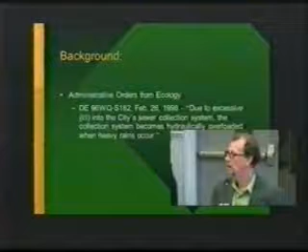In terms of background, the city's been under administrative order from Ecology for a number of years. This is a quote from one of the letters we have. These orders have been modified over time. In 1996, there was a concern about the amount of I&I, inflow and intrusion, into the system, and the collection system, as is quoted here, becomes hydraulically overloaded when heavy rains occur. What folks were experiencing out and about in the community were surcharging manholes, parks that were being flooded with raw sewage, and other issues that Ecology said you must take care of.

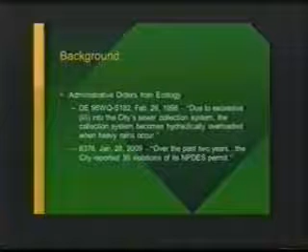In more recent times, we've had problems in relation to the I&I that have resulted in permit violations from our downtown plant. The downtown plant is upgraded now, but at the time we were dealing with this, we had a very old plant that was past its design capacity, and we were trying to understand how to go about taking care of these orders and address these sanitary issues. Ecology was asking us to be proactive.

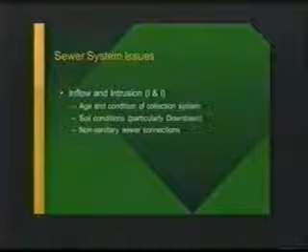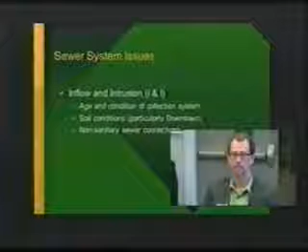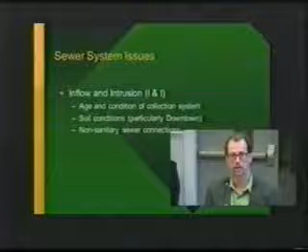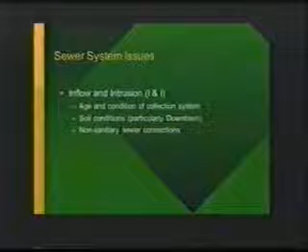So, a little bit of a description about our inflow and intrusion, particularly in the downtown basin. Some of the systems here were built in the 20s and 30s. At the time, the technology was to actually build a leaking sewer system, and that was part of the way to address effluent—to allow it to leach into the soil, into the groundwater, and just get rid of it. What we know now is those leaky pipes are causing a lot of this inflow and intrusion that we're dealing with, and they also affect the quality of the groundwater. So particularly in the downtown area, where we have a high groundwater table, there was a heightened need to deal with these I&I issues.

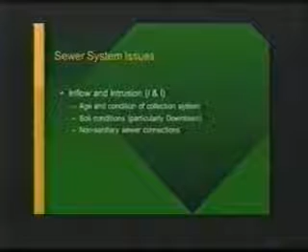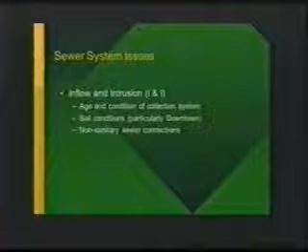Soil conditions play a part in this. Some areas in town are different than others, again, the downtown being most acute. It also has creeks nearby that are affecting the movement of this groundwater. Another issue that is part of this equation is other connections that aren't part of our sanitary sewer at all. Folks that are just connecting to get rid of stormwater will often make a connection to the sewer system to deal with that.

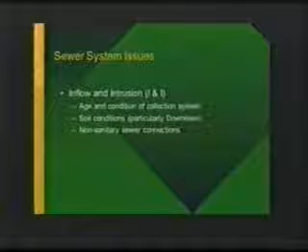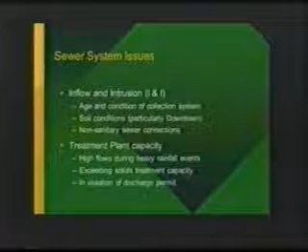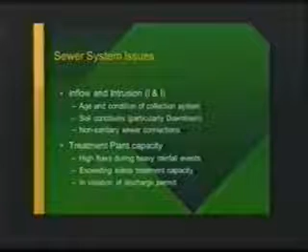The second part of this was our treatment plant and dealing with the capacity needs. The I&I, particularly in high flow events, would overwhelm our system. We couldn't provide the treatment we needed to provide. We would exceed our solids treatment capacity. That was really an effect of the system just needing this upgrade, not designed for a city of this size. And again, violations of our discharge permit basically on a monthly basis.

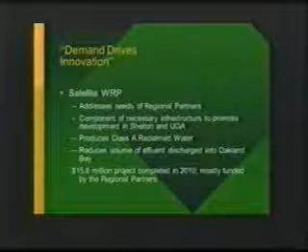Early on in the discussions with our regional partners on how to address this, there was a plan that was rolled out to update the downtown plant to accept effluent from our regional partners, the State Patrol and Department of Corrections. Over time, that plan was modified to what we have today, and that's building a satellite facility. That satellite facility is serving our regional partners, but it also provides us the capacity to meet new development and other customers in the northern part of the UGA.

It produces a Class A reclaimed water, which is a nice byproduct to have. We can use that for just about any purpose except drinking water—certainly for irrigating fields and those types of things, industrial uses.

So we have a commodity that's a byproduct of this that I think is just an added attraction. We are, by completing the satellite plant, reducing the amount of volume of effluent that's discharged into Oakland Bay. As you're well aware, Oakland Bay is one of the most prolific aquaculture fields on the West Coast, and we're helping to do our part to preserve that through these measures.

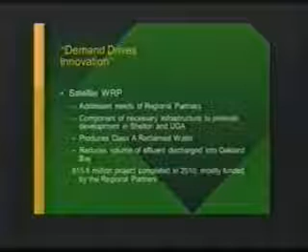This particular element of the project was finished in 2010 at a price tag of over $15 million, but most of that cost was borne by our regional partners. And they are also paying for the service of maintaining and building reserves to maintain this plant long term.

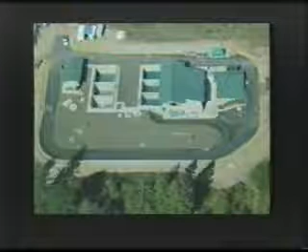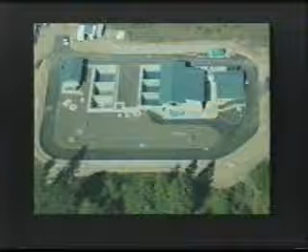This is an aerial view of the plant when it was about 95% complete. Folks in the audience maybe haven't seen that before, but this was designed so it can be built and expanded in phases. This initial phase is enough to accommodate our partners and provide the city some capacity to take on new customers, but there's enough room in the surrounding area to build 2 additional phases. So the long-term plan is to see that come through, and that's again spelled out in our CIP as a longer-range endeavor. But this facility has the capacity to increase threefold in terms of its daily ability to handle effluent from the northern area, northern Shelton UGA.

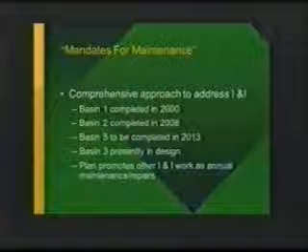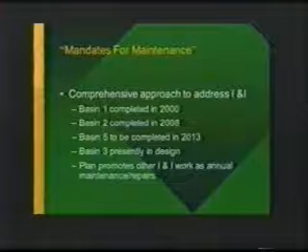Within our approach, we've landed on a sequence of events here. Some of these have been accomplished, as you see here. We initiated with Basin 1, the core area of the downtown that was completed in 2000. Some time went by, but we eventually designed and constructed Basin 2 in more recent time. That was completed in 2008.

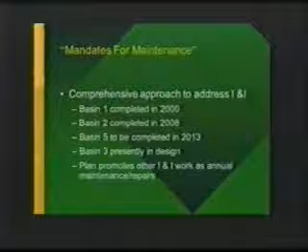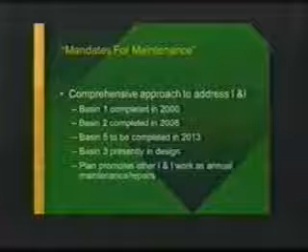We're currently working in Basin 5, which is basically the Hillcrest area around Olympic Highway South. That work's been going on over a year, and we believe in the next 6 to 8 months, probably less, the construction side of that will be done. We'll have closeout and other types of things to drag on that project over time, but the construction end of it is nearing its end. And that's a very large basin that we expect to complete.

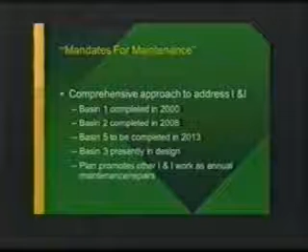We've initiated the design for Basin 3, which is the final basin in the downtown area. And we'll talk about that a little further in the presentation here, but the goal is to be prepared so that as the funding mechanism we choose is available, we're ready to move forward and complete the last of the downtown basins.

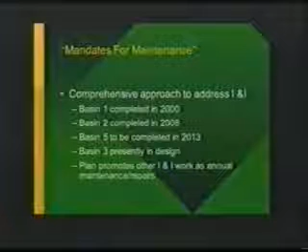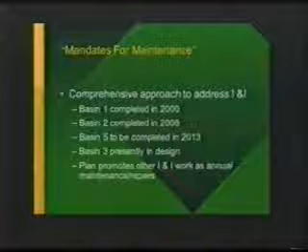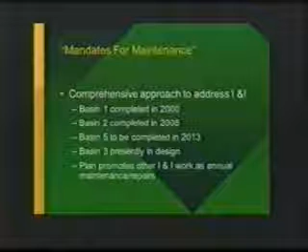Our plan is to also tackle some of this I&I work incrementally, and I'll speak about this in some detail, but we want to move from this current and past practice of tackling these basins as large projects and try to bite off pieces of a basin with some maintenance activities that we'll do over time with our city crews. We think this will save us a whole lot of money and avoid the need to borrow these large sums of money to tackle these basins. We can incorporate this into our operations.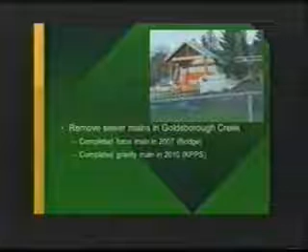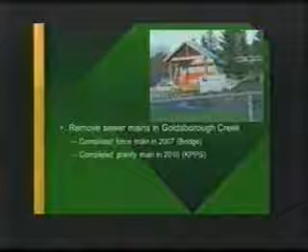In addition to all that work, we had a couple of sewer lines that were in Goldsborough Creek. And you may recall that Ecology was also asking us to address those. We removed the force main out of Goldsborough Creek in 2007. There's a bridge now on the east side of the creek. If you go past First Street, you see that little green structure there. That's the force main now out of the creek.

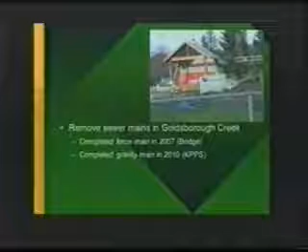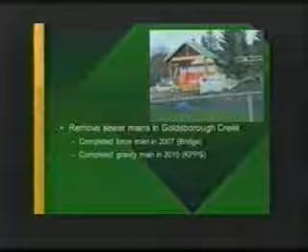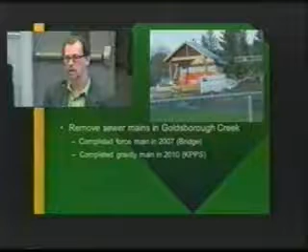The second portion of that was a gravity main that was crossing the creek on the west side. That was completed as part of this Kneeland Park Pump Station project, which the picture is showing in partial completion. That pipe is still in the creek, but it is not essentially used as our day-to-day operation. It's only there right now for emergency needs, and to help us better understand what we need to do to most effectively stabilize the creek bottom, whether that pipe serves some purpose or not, and that's part of an ongoing discussion.

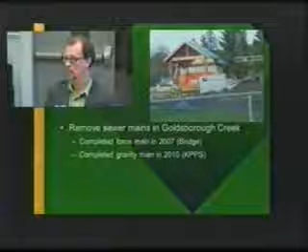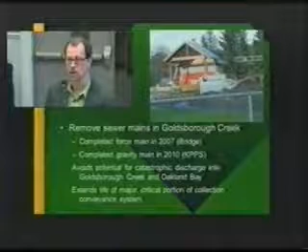But we are no longer in a position where some damage by a tree root or something coming down the creek during a high flow event would bust a pipe and cause a catastrophic discharge into Oakland Bay and affect our aquaculture industries here. So that portion has been done and it is fully completed.

Describing some of the work we did with the downtown plan, we addressed our long-term capacity needs. We increased the solids handling capacity of the system by 100%. This takes us to a 20-year planning horizon for the downtown area, and along with the I&I development that has occurred, it provided us some certainty for new development. I think that was a big milestone in itself.

You may recall a few years ago we were in a moratorium for sewer connections. We had a waiting list for folks that could come and connect, but we had a limitation on that, and this was a struggle for any large development coming into Shelton to describe how they would address our sewer needs. We have limited capacity, we have I&I issues all over town, but we have a great deal more certainty than we had then.

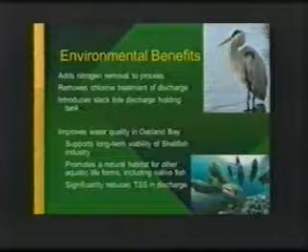It offers a number of environmental benefits. In terms of the plant operation, we added a process to remove nitrogen from the effluent. This will help the biological aspects of what's going on in the estuary and the interaction with the fish and aquatic life. We changed from a chlorine treatment to a UV treatment, so the effluent now does not have a chlorine component. And we incorporated the slack tide discharge tank, which allows us to retain effluent during slack tides, allowing better mixing as we release the effluent during tidal movement. We also extended the outflow pipe, I believe 96 feet.

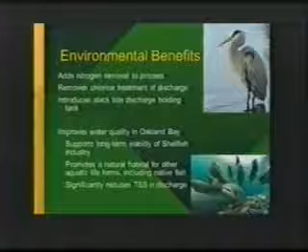These environmental benefits are paying dividends in Oakland Bay. I believe 280 additional acres have been opened up for shellfish harvesting, in part due to this activity. It's improved the natural features of Oakland Bay, particularly salmon movement through the estuary, and it's reduced TSS, which stands for total suspended solids, within our discharge.

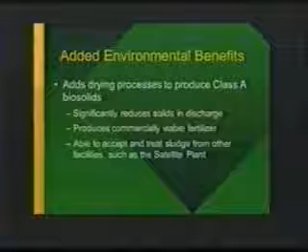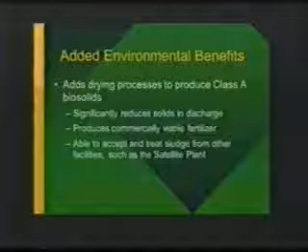But wait, there's more, as Jason would say. We also added a process so that we now are producing a Class A biosolid. This is a fertilizer you've probably heard of in other jurisdictions. We now have the ability to produce that, and we're working through the final issues with having that in full production. This reduces the amount of solids in our discharge, helps us provide fertilizer to the community for free, and we have the capacity within that system to accept sludge from other jurisdictions, so this could be a benefit the region could gain from, not just Shelton.

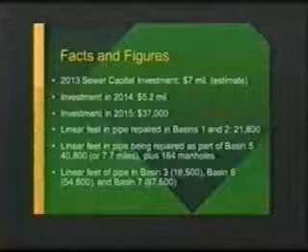Not to break up your thing there, but now I've been told that fertilizer can be put on my vegetable garden. Is that a true statement? Mike, is that a true statement? That's my understanding as well. So I'm excited about that part of your presentation. We'll have you back up the truck tomorrow. How about that? There you go. I need it.

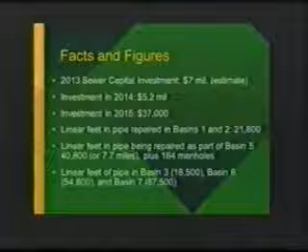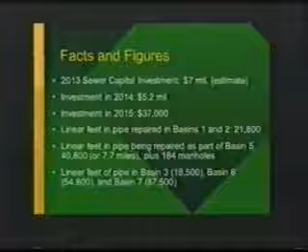Transitioning to the dollars and cents of all this, providing some figures here for the I&I work and our capital work moving forward. This year, our capital investment is going to be about $7 million, predominantly completion of Basin 5. Our investment in 2014 is $5.2 million, anticipating we will move forward with the Basin 3 construction project. As you can see, our investment in 2015 starts to diminish considerably. Part of our objective is to try to cap the amount of capital projects the utility is taking on and reduce the amount of debt we are continuing to accrue, and we're transitioning to that position as part of this comp plan effort.

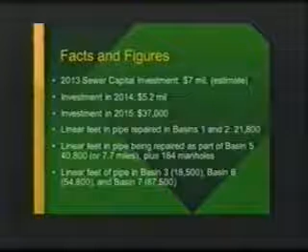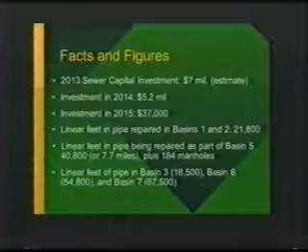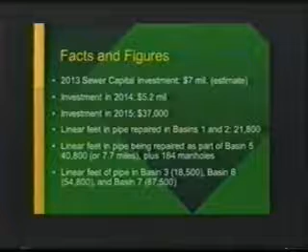These last points describe the magnitude of these projects, and I think that's worth describing. Basins 1 and 2 combined were just under 22,000 lineal feet of pipe that was replaced. Basin 5 is nearly twice the size of both of those basins, almost 8 miles of pipe. Basin 3 is almost the size of both of those basins combined, a little less. Basins 6 and 7 are described there as well. Those are newer basins, modern in some respects. There's certainly pipe that's aged, and pipe that's relatively new, so tackling those is a different approach anyway.

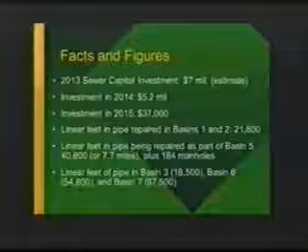Our objective is to start to look at Basins 4 and 6. Basin 4 is a very small basin, and we'll just continually make steps to improve the I&I issues we're dealing with, to monitor that, but to track away from this large basin-wide effort that requires a lot of debt capacity.

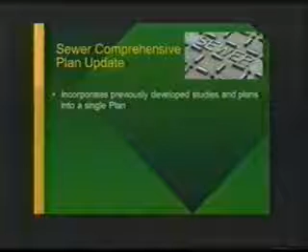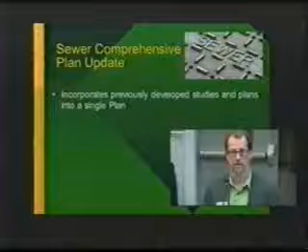So as we describe the sewer comprehensive plan, we'll be bringing that to you in the coming weeks. That plan, in its larger sense, was developed by taking a lot of planning work we've done over the course of the last 15 or 20 years and combining that into a single plan. There's been a lot of effort to study and analyze our sewer systems, but not a real plan update for quite some time. So this plan provides that single document.

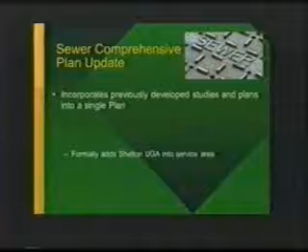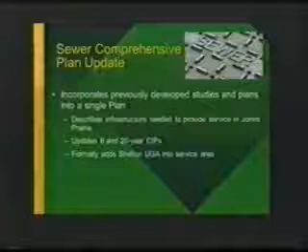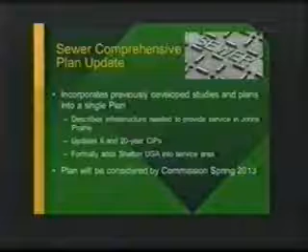It will assess what we need to do as a utility to provide service to the entire UGA. That has never really been analyzed before. Part of that is what infrastructure is needed to eventually serve the Johns Prairie area, and in particular the industrial development out there. It updates the 6-year and 20-year efforts, again trying to assess our needs for the long-term and near-term. We'll hopefully have that completed in a few weeks and begin a public process and discussion with agencies and others as we formally adopt that plan.

Our consultant that prepared the sewer comprehensive plan looked at this in terms of lineal feet of pipe, size of material, and did a quantities estimate analysis of the project, coming up with their own estimate. Their estimate is a little higher, at $3.8 million, and that's the number we used in our analysis moving forward. I believe it's a conservative number in terms of what this project may really cost, but that's what you'll see in the plan.

The plan describes these trunk lines within the city that we need to address over time. Mainly these aren't necessarily an issue because of I&I issues. They're an issue because of capacity issues—certain pipes in limited areas are approaching their capacity now, and as new development occurs, we need to figure out how to upsize those or make sure we can accommodate development as it occurs.

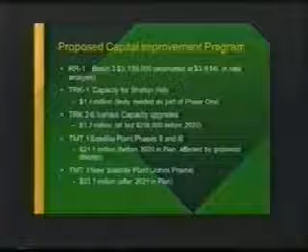The plan includes second and third phases of the satellite plant, as I earlier described. Those are expensive endeavors. The second phase is anticipated around 2019 in the plan, but we don't believe that will necessarily play out as things go on.

What we are anticipating is to include, as part of the Shelton Hills development of their systems, a diverter that will allow us to divert our effluent flows between the satellite plant and the downtown plant. By doing that, one benefit will be to extend the capacity of the satellite plant. Otherwise, we would have to begin implementing a second phase sooner. By being able to shuttle some of that effluent down to our downtown plant, we can extend the time frame needed to actually implement phase 2. That will probably go beyond that 2020 horizon, and it's not unlikely that phase 3 might even approach the 2030 horizon.

The last item here is a new satellite plant in Johns Prairie. The cost associated with that is in the slide—about $23 million. Of course, that's a long-term item, probably on the far end of the 20-year horizon, and that's not built in. Neither of those projects, in fact, are built into the analysis in terms of what we need to do with the rates now. It's something to think about, but it's not in any of the rate analysis we're contemplating at this time.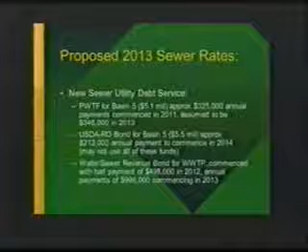The bottom bullet describes the payments for the wastewater treatment plant, the big project. We started paying that with a half payment in 2012 of nearly $500,000. The annual payments for that loan are just under $1 million, and that will commence this year. We will owe the USDA $1 million this year of new money for debt service on the wastewater treatment plant.

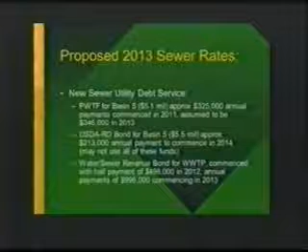So how are we going to pay for all that? We have two scenarios that we've developed as part of our analysis. One would increase the rates 22% for the remainder of this year, which is 8 months. That scenario, scenario 1, assumes that we will need to find additional capital funding to complete Basin 3, and that's built into that rate analysis. In fact, it shows here that we're anticipating we would begin to make $169,000 debt payments in 2014 to start paying that debt, and that is included in this performance.

Scenario 2 is an annual rate increase of 20% for this year. But that assumes that we would move forward to Basin 3 if we receive grant funding. That would be grant money that we would not need to build into our debt reserves or pay back.

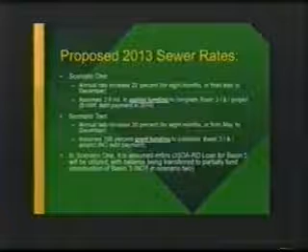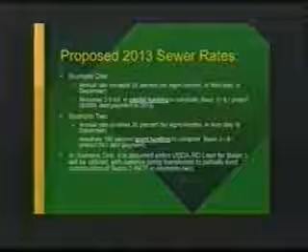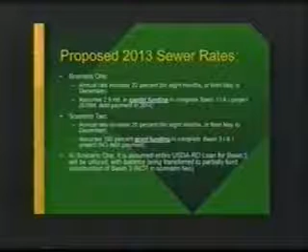As part of scenario 1, I should describe this further. We anticipate with Basin 5 that we are not going to utilize all the monies that we have requested through our loan. In fact, some of that money could be put toward Basin 3, and the balance would be transferred to fund that, and the other portion, the unmet portion, would be somehow circulated through a different loan. That is not the case for scenario 2. Scenario 2 is 100% grant money.

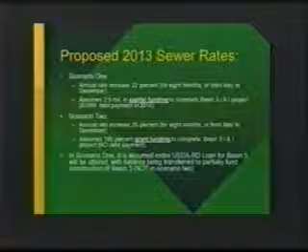We would return the unused portion of the Basin 5 funds as part of that rate structure.

Steve, can I interrupt you for a minute there? I see a lot of jaws dropping out there at 22 and 20%. Can you equate that to a dollar figure so that it's a little bit more palatable?

I can. Here it is. So the average single-family residence in town uses 738 cubic feet of water per month. This is the average; some folks are more and some are less, but on a total, that's our average. So the top portion describes what your current rate is today. You have a base rate of $26.65, and your consumption charge, as you can see, is $0.0533, or just over a nickel per cubic foot.

Combined, your average single-family sewer charge is $65.99. Again, that's average.

Under the proposed rates, the base rate and the consumption charge would increase 20% on scenario 2. That would change your base rate to $31.98. That would change your consumption charge to 0.0640 cents per cubic foot. And that would affect your sewer rate by roughly $13. It would be, as proposed, $79.21. So for the average user, the average single family, that's the increase that would be reflected on their bill for their sewer charge.

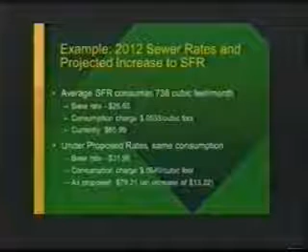So just before I finish up here, we've got some other factors I wanted to spell out. Those debt service payments that I described earlier result in a revenue deficiency of just over $1 million for the utility this year. That's why we're requesting this.

In both scenarios, scenario 1 or 2, the assumption was that we would collect that new rate for the final 8 months of the year. Part of doing that is the timing at which this action is taken. In order to bill and collect that new rate, we need to have the Commission consider this ordinance this evening, take a second reading as part of a public hearing next week, and be able to advertise that in the paper before the end of the month. That will allow this schedule to be maintained.

If we deviate from that, it will probably mean we have to have a little bit higher rate than I'm proposing here, because we'll have fewer months, in essence, to collect that $1 million difference noted in bullet 1. In both these scenarios, what we tried to do is soften this rate over two years, and this analysis would require, as part of a second step, a rate increase for 2014 as well.

But we are not trying to land all of that increase on one year or the other. We're trying to expand it over a longer period of time. As part of what we considered in our capital work, we would add $200,000 to our operations commencing in 2016 as a way to avoid borrowing further capital for these large basin projects.